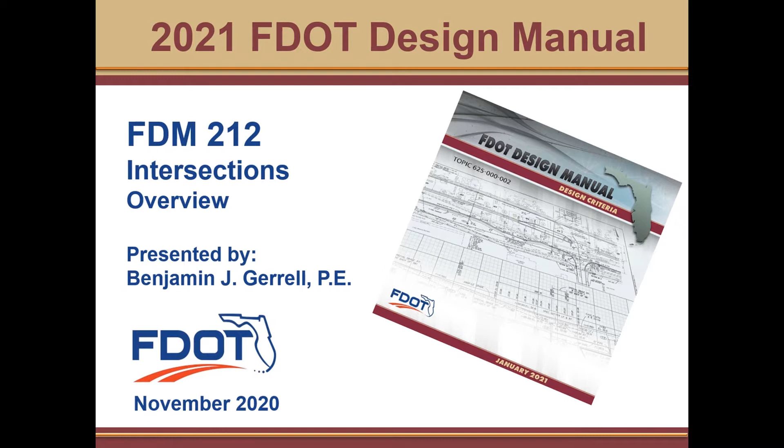Hi, my name is Ben Gerrell, and I'm a roadway design engineer in the Roadway Design Office in Tallahassee. This presentation will cover the major changes for FDM 212 for this update.

The two major changes made to the intersection chapter this year include a new subsection for turning roadways and a location change for the island section. The new turning roadways section includes guidance for an alternative design for channelized right turn lanes.

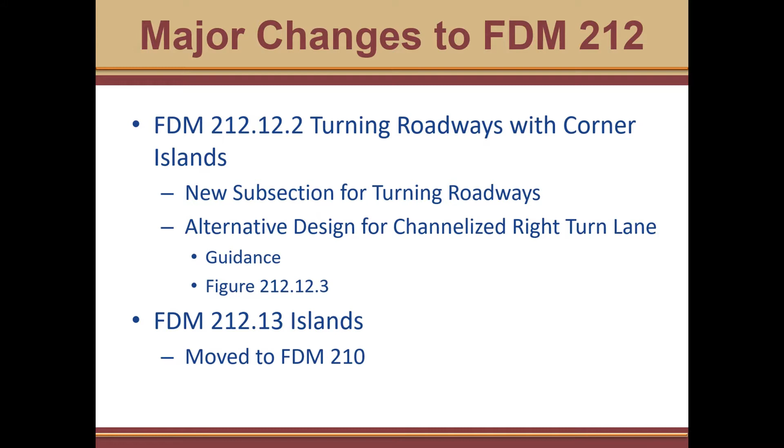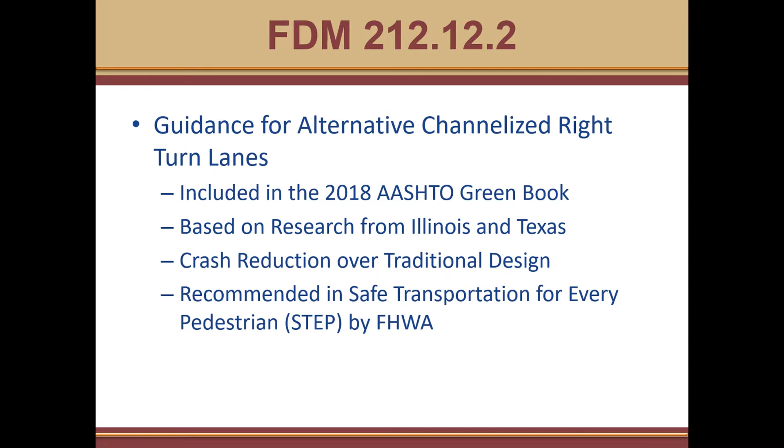The districts requested criteria or guidance for a modified version of the channelized right turn lane. They were aware of this modified or alternative design included in the 2018 AASHTO Green Book and some research from Illinois. The Illinois research found that the modified design could decrease crashes by 59% over the traditional design. This modified design is also recommended by FHWA to improve pedestrian safety.

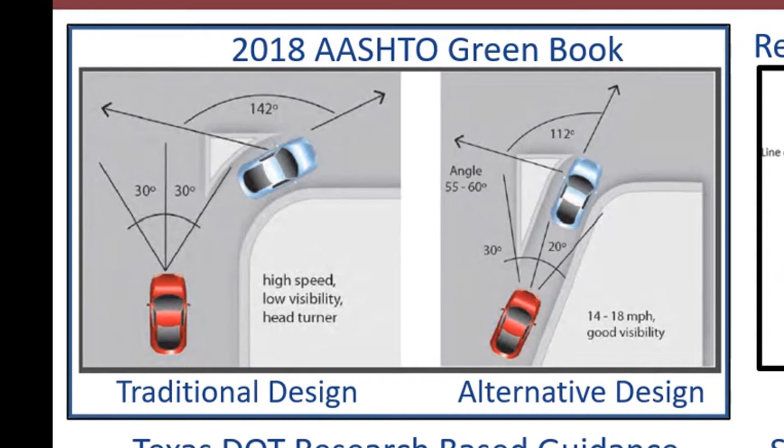The top left figure from the latest AASHTO Green Book shows the difference between the traditional design with a flat angle of entry there on the left and the alternative design with the near right angle of entry to the cross street shown on the right here. And as you can see, the alternative design improves pedestrian visibility by changing the driver's angle of approach to the crosswalk. And it reduces the driver's head turning movement at the cross street and reduces vehicle speeds.

The figures on the right also are the result of some Illinois research on the modified right turn lane. The options shown include all the benefits mentioned in the AASHTO Green Book, but they also provide room for a large truck to make the turn as shown in option 2 with the striped out area. The research resulted in a CRF of 59, which they included in the Crash Modification Factors Clearinghouse. However, neither AASHTO nor Illinois gave a great deal of guidance or criteria, especially for pedestrian accommodations. So we looked at FHWA and other states to see what they had done.

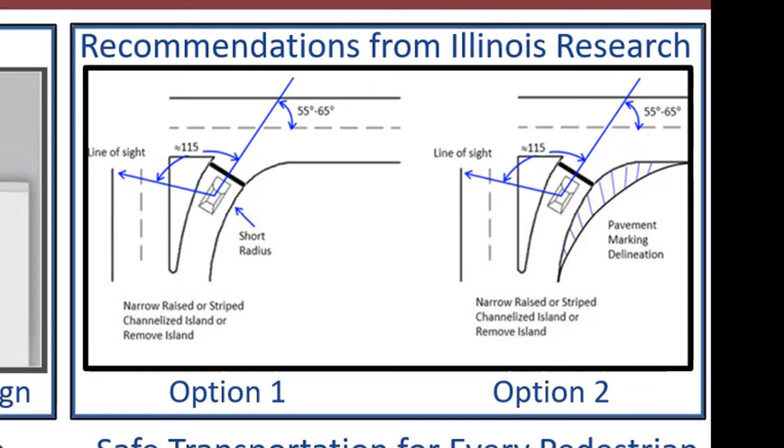The Texas DOT researched the alternative design and developed guidance based on that research. Their approach was to create a balance between the safety and mobility of all roadway users. They have 14 pages of guidance for new construction and retrofit treatments. The figure on the bottom left is one of the figures included in their guidance.

Texas design provides guidance for crosswalks with a minimum setback of 20 feet from the yield line. They also recommend that the angle between the right turn lane and the cross street be 70 degrees with an absolute minimum of 55 degrees. And you can see they provide the same type of striped out area that Illinois showed.

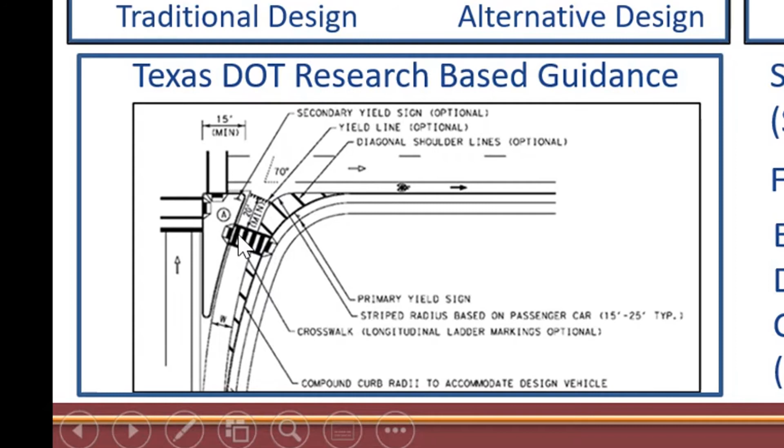And the idea of this design is that vehicles, as they approach, they'll be able to see pedestrians ready to cross or crossing the crosswalk, and they can slow down or stop for them. And then they can proceed past the crosswalk, stop, and look for gaps in oncoming traffic, or just slow down and look for oncoming gaps in traffic, and then pull out. This way they're only having to do one thing at a time. First they look for pedestrians, then after they get past the crosswalk, they look for gaps in traffic. When they're pulled up in this 20-foot minimum space, they aren't impeding the flow of pedestrian traffic on the crosswalk.

And the figure on the bottom right is from FHWA. As you can see, the FHWA design is very similar to Texas DOT design. They also have a recommended value of 70 degrees. Well, they say 55 to 70 degrees, the angle between the right turn lane and the cross street. And they recommend that the crosswalk be set back a car length. And a passenger car length as defined in AASHTO is 19 feet. So it's pretty close to the 20-foot minimum that Texas recommended.

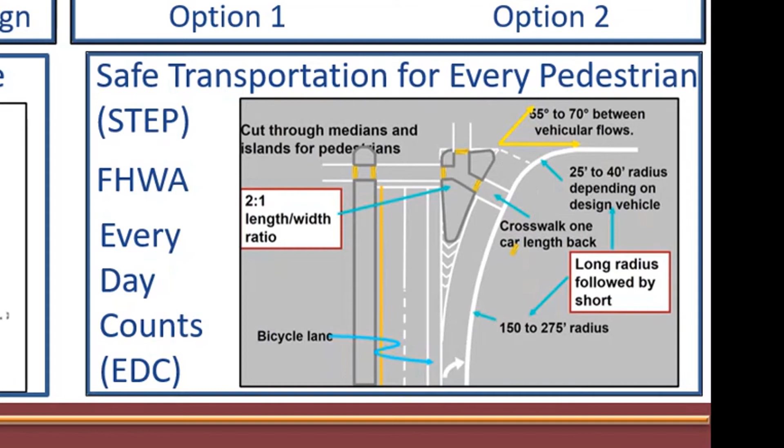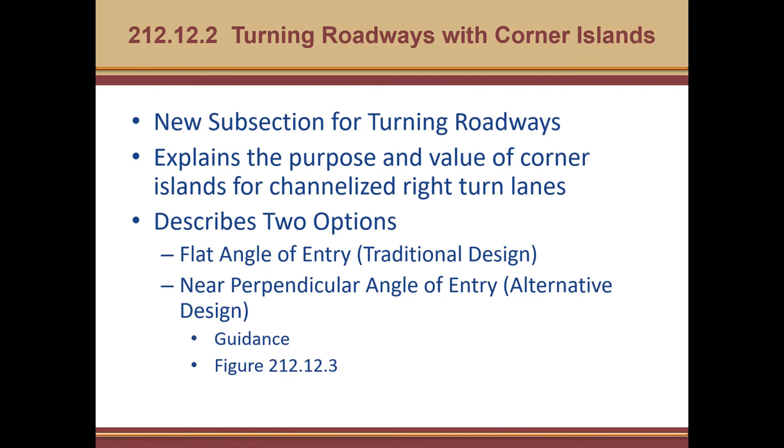So based on all the information that we gathered from other states and from FHWA and AASHTO, we developed this new section in the turning roadways section and called it the turning roadways with corner islands. And basically, this section explains the purpose and the value of corner islands and channelized right turn lanes, and describes the two options: the flat angle of entry, which is the traditional design, and the near perpendicular angle of entry, which is the alternative design.

We also provide a figure, which you'll notice is very similar to what was shown in FHWA and the Texas DOT design. We thought those were some very good, very well thought out designs, and so this is very similar to that. In the language, we say it's preferred that you don't have an acceleration lane. We don't want you to have an acceleration lane when you apply this design. It's also best to put it in a C2T context classification, or a C3, C4, C5, all the way up to a C6. It's preferred also to have it in a low speed design, 45 miles per hour or less, where you have pedestrians present.

And it's also preferred to have a deceleration lane as you approach the turning movement. That way it gives the approaching vehicles time to slow down if there's a pedestrian crossing the crosswalk. And you'll see the lane is all channelized so that the passenger cars will stay close to the island. And then the outside is striped out up to the curb, and then the crosswalk, and then the sidewalk on the side. The idea, again, is that it allows large trucks to encroach into that pavement marking area so that they don't run over the curb or off the pavement. And that's pretty much it.

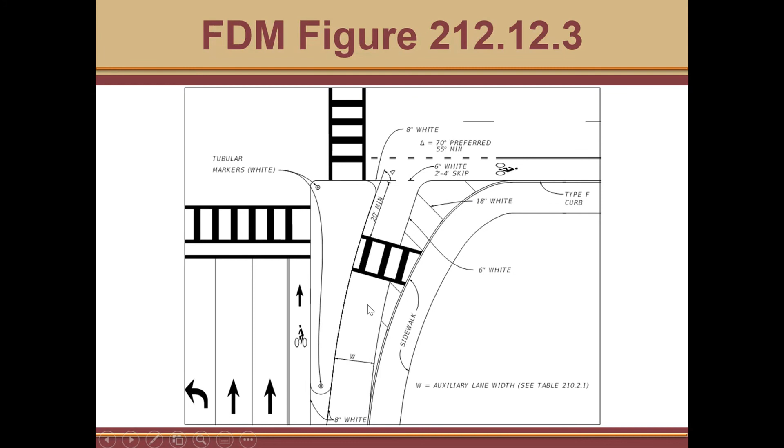So the next big change was for FDM 212.13. What happened here was all the island information, the criteria that was in this section, has been moved to FDM 210, which is our arterials and collectors chapter. It's been moved into FDM section 210.3, which is now the medians, islands, and hardened centerline section. So for more information on that, you really want to read through FDM 210 and listen to the webinar on 210.